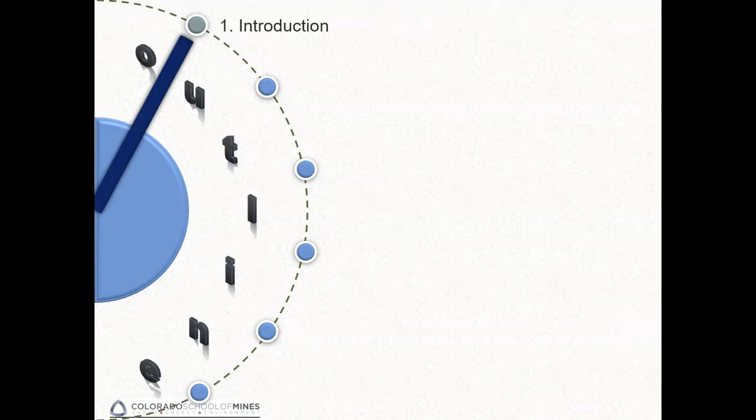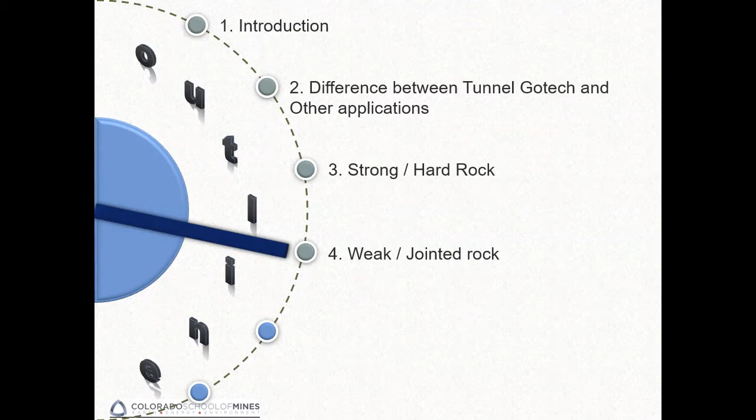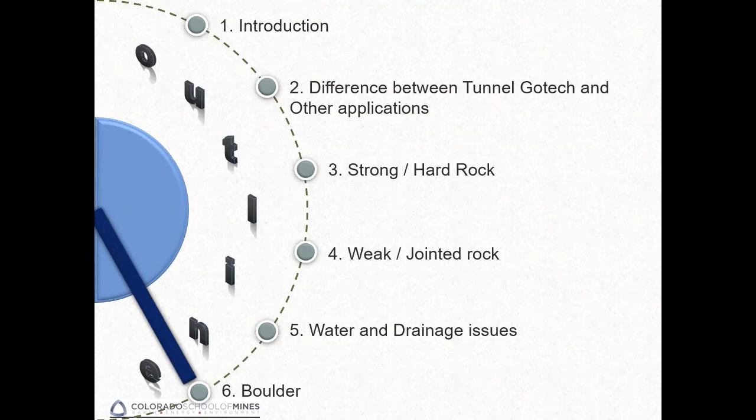The topic that I wanted to talk about is the lessons learned on the claims that have come across in the tunneling world, especially for tunnel boring. So essentially, we'll talk about what makes tunneling very special, and especially the issue of geotech investigation. We'll discuss some of the issues we've encountered relative to hard rock, talk about weak and jointed rock and what the issues are and what the typical claim situations are for jointed rock. Of course, water has been chasing miners and tunnelers from the beginning of time, and it's consistently an issue there. And I'd like to touch upon the issue of boulders. Boulders are made of rock, but they're in the matrix of soil, and they're the worst of things we can encounter in tunneling, especially with TBM.

So diving right in, essentially, why are we talking about this? Why is this issue important? If you look at the world of tunneling and contracts, about 90% of contracts in tunneling end up in claims of some sort, one way or the other. Could be a change order, it could be an actual construction claim relative to differing site conditions. So differing site condition is the term I'm going to use, DSC. So if you hear me saying DSC, that's what it means, differing site condition.

And what it refers to is that the contractor comes in, starts the tunneling, and something happens, and essentially they can go to the contract clause and say the site is different than what I was told. It's different than the geotech investigation reports and geotech baseline report. And that is a basis for claiming and getting compensated, right? So this DSC is a major issue in the world of tunneling.

Why is it happening so frequently? It's because we have a borehole here, a borehole another couple hundred meters away, and so on and so forth, sometimes a couple of kilometers before we have any information. And it's left up to interpretation of what is happening between the two.

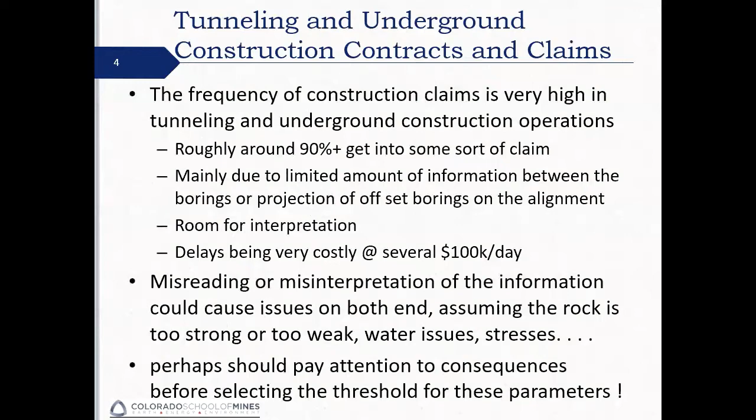Although the industry has tried to address it by advocating geotechnical baseline reports, which essentially look at the information and set up a baseline for all the contractors, there is still some room for interpretation. The key takeaway I will reemphasize is that you have to look at the consequences of each of these situations before you can come up with the right way of addressing it in your geotech investigation.

The first construction claim I got involved with was actually in the early 1990s. I started working at EMI, and there was a project going on in Colorado Springs for a water tunnel, the Twin Peaks tunnel. The TBM was small, and the rock is typically granitic, but it's pegmatite - very coarse-grained Twin Peaks pegmatite.

The claim was on low penetration rate on the machine. We brought some large samples from the site here at EMI, and we tested with a linear cutting test.

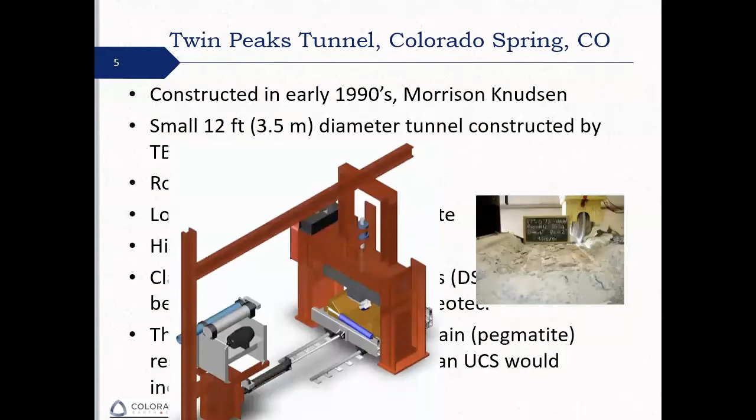We recorded the forces, and what we found out was that the forces on the disc cutters for cutting of the rock of the TBM in pegmatite and coarse grain granites was different than a typical medium grain or fine grain granite. That was not actually reflected in the unconfined compressive strength, which was quite an interesting situation. So higher forces means lower penetration by the TBM. And guess what? That was the differing site condition there.

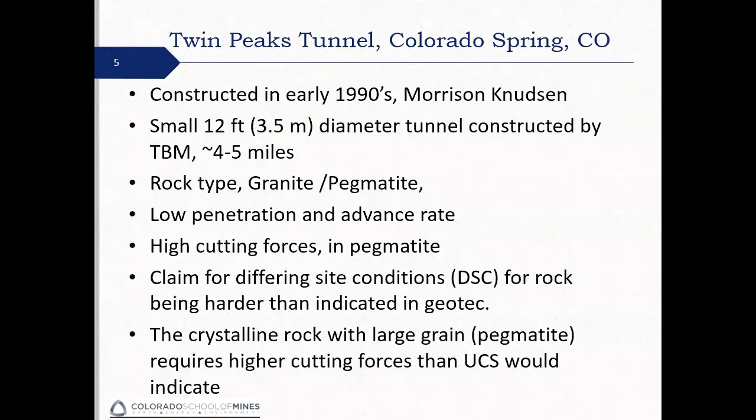These are the pictures and actually drawing of the linear cutting machine and the surface of the rock in our testing at EMI.

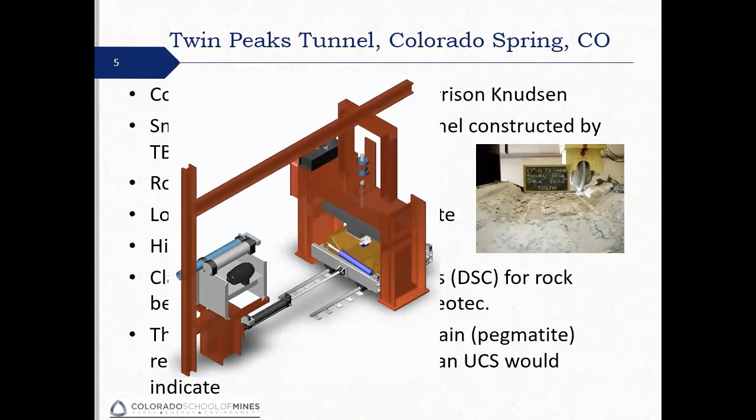A follow-up project was the Boston Outfall project. This is a project where they sink a shaft, go under the ocean at Deer Island, and collect all the sewer from the Boston area and pump it into this outfall, where it gets diffused in the water stream in the ocean. So it's a 10-mile long tunnel, 26-foot diameter, roughly 7 or so meter diameter, built by the Kiewit Atkinson Kenny joint venture. The geology of the area, Boston area, is primarily argillite.

Not much depth though, so the stress situation was not that bad. But a differing site condition was actually claimed because in the geotechnical interpretation or summary report, an expert had put down that estimated penetration rate should be 15 feet an hour.

What the contractor was getting was 9 feet an hour. Imagine you're planning for 15 feet an hour and you get 9 feet an hour - that's about 60% less, or 50-some percent less. That created a delay. The contractor actually claimed about $54 million at the time, if I remember correctly, because they had 54 weeks of delay at $150,000 a day cost of running the site. One week is $1 million loss, and 50-some weeks of delay because of the low penetration equals $54 million.

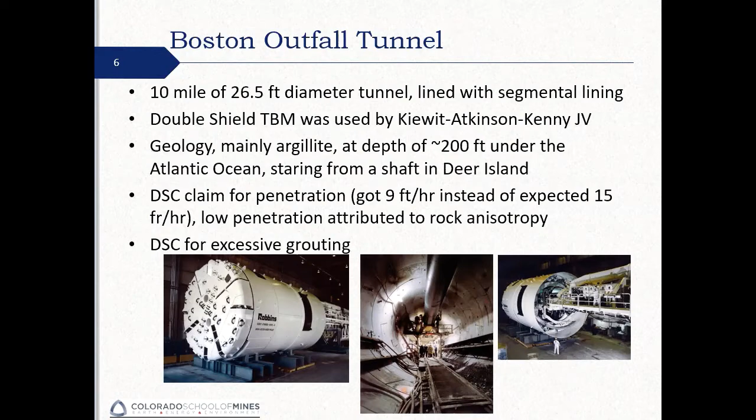In that same project - one of the early projects where they used a double shield machine that you see in the picture here - they had a different site condition claim also for grouting, because remember, this is going under the ocean. Argillite, which is a high-grade siltstone sandstone, is supposed to be a very tight formation, but it was leaking water. You're going under the ocean, you don't want water in your backup. So they had to do a lot of grouting - a $70 million claim for the grouting as well.

That was the situation, and right around the same time, 1995, we got involved with this project in Queens - the Queens Tunnel, a water tunnel in New York City.

The claim there was related to formations in a Manhattan schist known to be in the area. The tunnel we got involved with, the Queens Tunnel, was actually built by Kiewit Shea joint venture, a 23-foot diameter machine, roughly 6.5 to 7 meters in diameter, 700 feet deep, about 210 meters.

Again, a low penetration claim. They were getting 6 feet an hour as opposed to 9 feet an hour that had been anticipated. That's about a 30% slower penetration, which means the project is going to get longer and the cost is going to be higher.

We looked at the rock mass conditions. In this case, the issue was rock mass and the frequency of joints. The claim was actually on both ends. There were areas where the joints were less than anticipated, so the machine was going slower. When you have more joints, you anticipate going faster, but the joints were not there, so it was going slower.

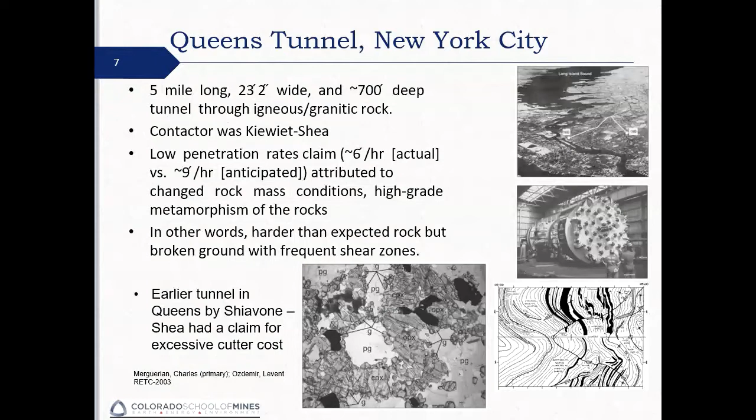You've got to have it somehow fixed and figured out. At the same time, it was funny - at the end of another project, built by Shiavone Shea, another joint venture contractor, a different section of Water Tunnel Number 3 in New York, they didn't have a penetration rate claim, but they had a cutter change claim. The claim revolved around using more cutters than the abrasivity of the rock indicates.

When you have more abrasive rock, the cutters wear faster, so you have to inspect them more and change them more. You have to pay for the cutters and the time of change. It impacts the utilization, meaning your daily advance rate suffers. With daily advance rate being lower, the construction time goes up, hence the claim. So you can see in a simple situation, you can run into a multitude of complexities relative to the machine.

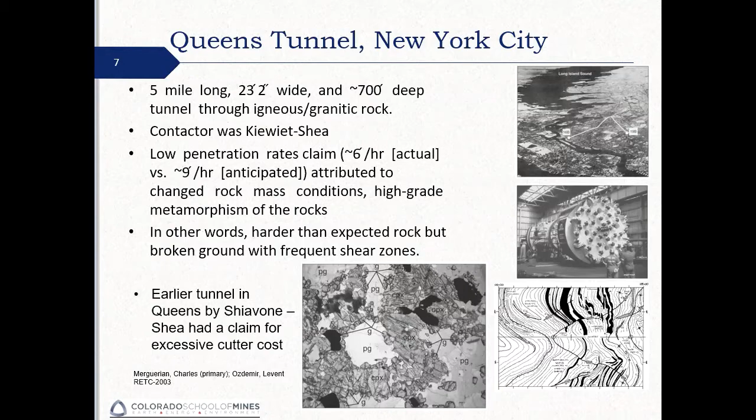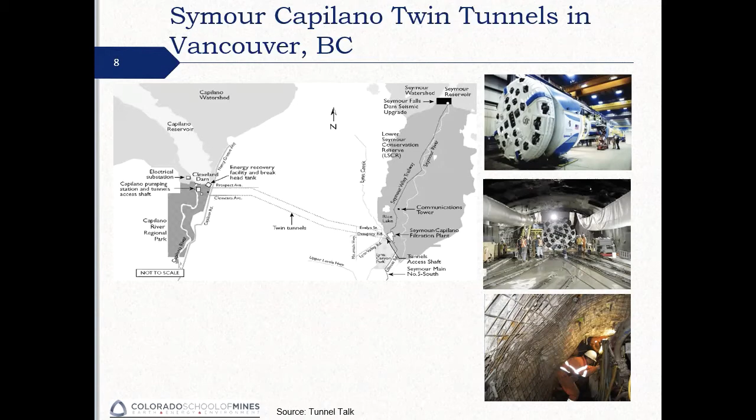The next one, the Seymour Capilano project - I put this one in because it has to do with in-situ stresses. This is the project my tunneling class is very familiar with, because it's their base background project for the semester. This was a twin tunnel going between a dam and a water treatment plant, roughly 7 kilometers, with two tunnels, 3.8 meter diameter. The depth varied between 300 to 600 meters going under the mountain.

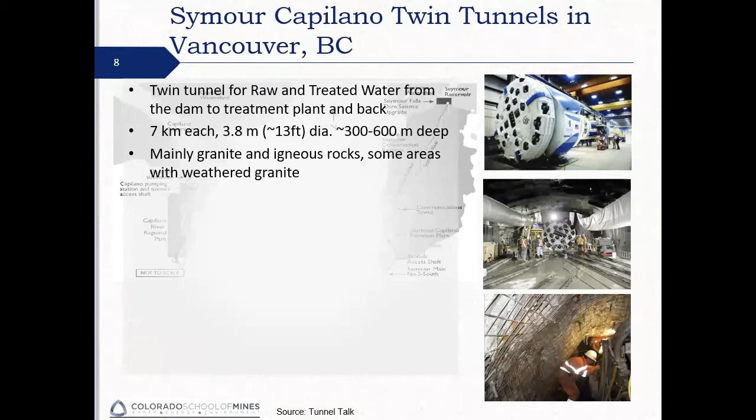The rock was primarily granite, beautiful good granite, but certain sections were actually weathered. However, as they moved in and the depth started picking up, you could see breakage in the formation at the 5 o'clock and 11 o'clock positions, going towards the tunnel. Imagine 12 o'clock is the roof, 6 o'clock is the floor, and the rib lines are at 3 and 9. So 5 and 11, an almost vertical but angled position, was breaking up, and that was because of the in-situ stresses.

After the fact, when we actually measured it, the horizontal stress factor was 2 to 3.5 times the vertical stress. So you're going under 600 meters of overburden with 2 to 3 times higher horizontal stresses - imagine what's going to happen. The 5 and 11 o'clock breakage was because the tunnel was actually being squeezed on the side, so these two points were actively spalling and breaking up. In several visits to the site, we were just sitting or standing on the backup, and you could hear the ground breaking up. It was pretty interesting and scary.

In January 2008, they had a rock burst event. There were 2 machines going simultaneously, one ahead of the other. The machine that was about 100 to 200 meters in front of the other heading had a rock burst where they gently went into weathered ground.

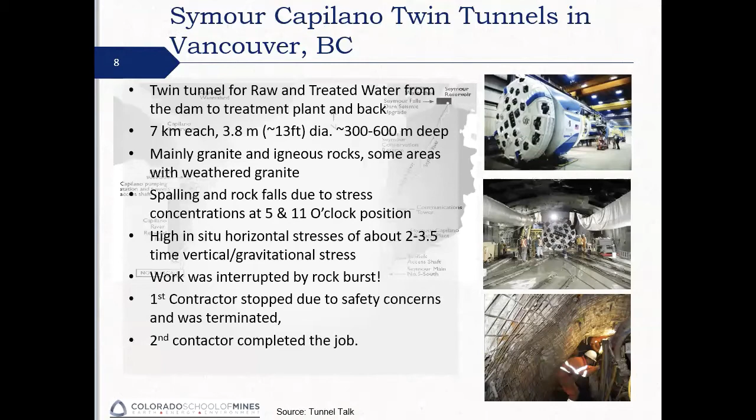So if you're in an area where you anticipate high in situ stresses, you have to take it into account and essentially care for it.

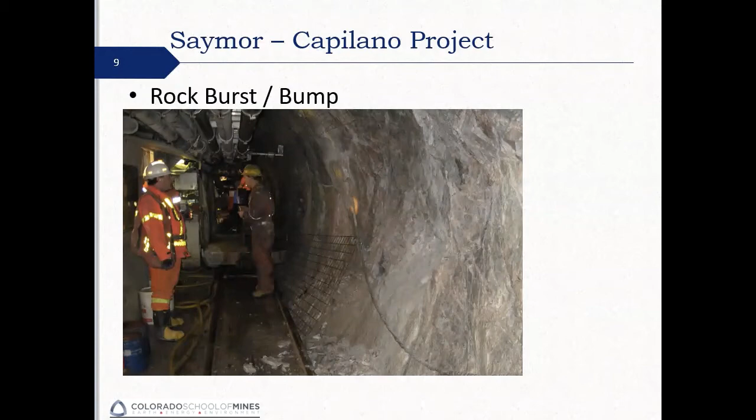Because here's what happens - you can see the profile is supposed to be a circle, right? And the wall up to about a couple meters had already collapsed and come in. This was what the roof would look like - it's bulging, it is actually actively crushing the roof and floor. And in the roof area, it was accumulating on the wire mesh, you could see it.

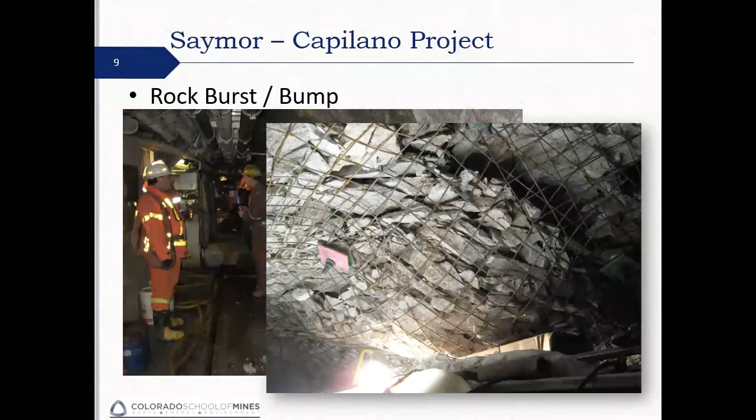When you see something like this, you cannot just walk by and continue tunneling. You have to go cut the wire mesh, clean up that mess, set up another set of wire mesh, and do the bolting again. Imagine that bolt - what is it holding? The anchor is holding onto some part of rock, but the rest of it is literally holding the broken ground. So you have to cut off that bolt and put new bolts on.

Let me show you this quick video. Okay, it doesn't like it. Anyway...

In the video, what you see is the machine actually cutting into the ground, and here is the finger shield behind the head. As the machine is cutting and going in, right behind the cutter, in the finger shield area about 2 meters behind the face, the ground is crumbling and coming down. It's breaking on its own because of the stresses. That is the situation they had to deal with.

Of course, if you go to some of the longer tunneling projects, like the Gotthard Base Tunnel - a 57-kilometer tunnel, 151 kilometers total with the crosscuts and everything, the TBM portion about roughly 100 kilometers - the project went under up to about 2 kilometers worth of overburden.

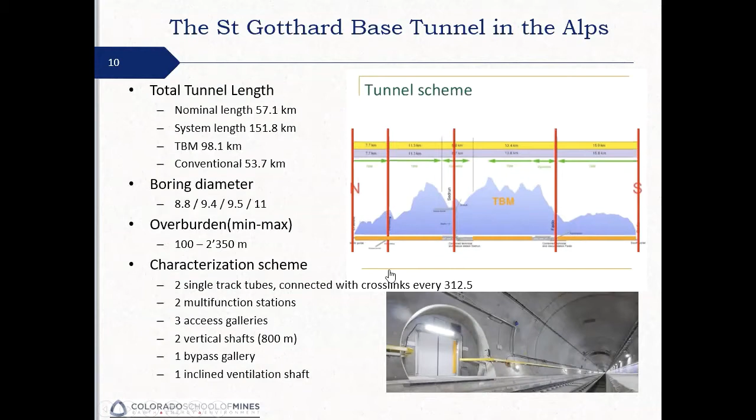No matter what rock type you're going through, when you go to 2 kilometer depth, the in situ stresses are high, and with induced stresses added to it, you have to anticipate either rock burst or ground squeezing in most cases. The ground squeezing was actually an issue here. It forced them to change the construction methods from a shielded tunnel to open tunnels, because by design they allowed for huge deformation in the ground.

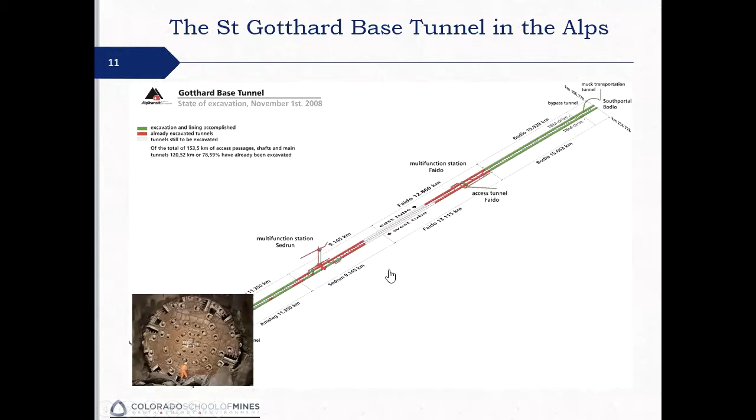So when you have an open TBM, it allows you to excavate, and in the back of the machine you put ground support up. But by design, you're letting the ground converge, and you have to put secondary and tertiary ground support in.

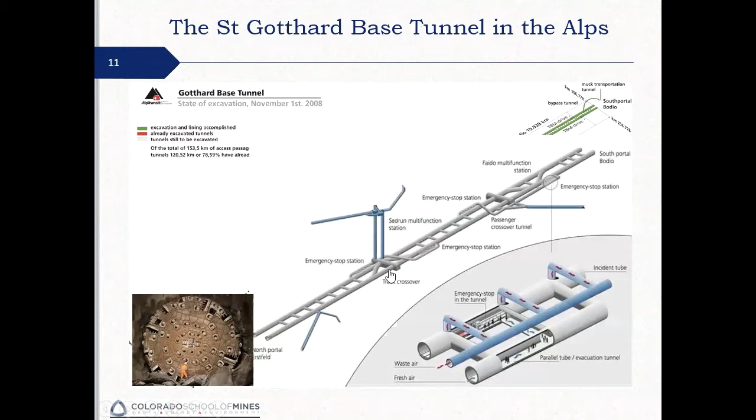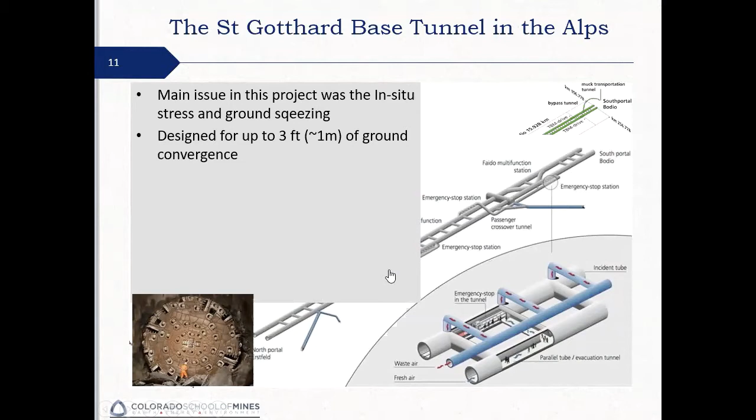In that project, based on what I know, they did a fairly meticulous risk assessment and were pretty much ready for a lot of this. By risk sharing, the owner was willing to pay for it instead of going directly to a claim. I don't know the details of the claim situation, but by design they had to deal with ground squeezing, and selection of the machine and construction method per section reflected that knowledge. They used an open TBM by design and allowed for a lot of changes.

The next project I want to talk about also has issues with ground squeezing. This was in Iran, the Ghomrud project. It was a total 50-kilometer tunnel in 5 packages. Package 3 and 4 were excavated by the double shield machine you see here. The general depth was not all that much, 200 to 400 meters, but the rock was weak, a schistose rock and fairly weak.

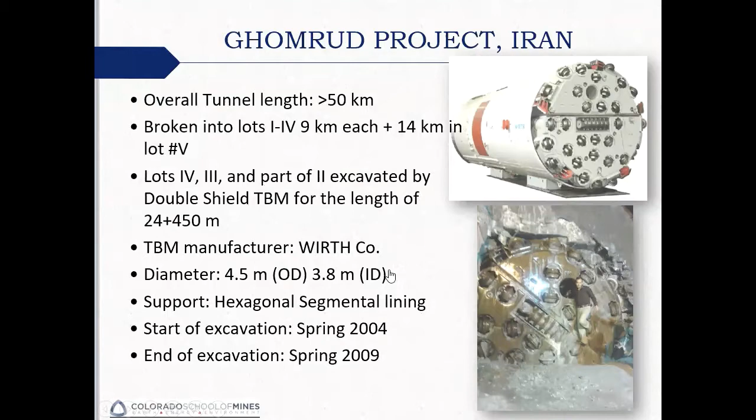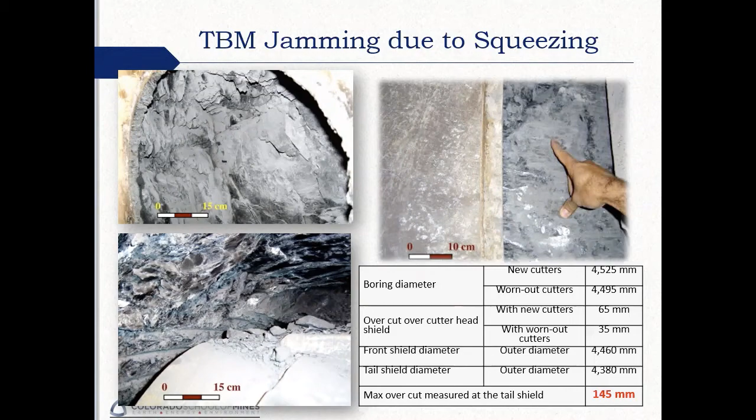It took them, the first time they got stuck, 4 to 5 months to release the machine. Releasing the machine is like this: you go out of the shield, manually break the rock and put posts, hoping that the ground would hold up, and when you release the machine you push against the segment to go forward. Very dangerous, very risky job and time consuming. 5 months, you can imagine the cost of that.

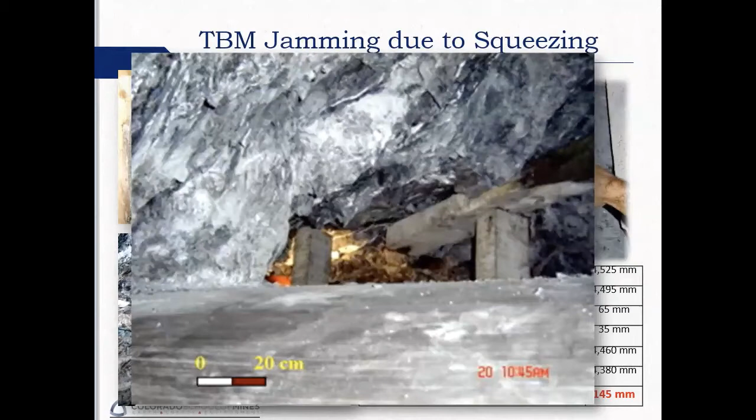So in ground squeezing, this is the situation, you have to anticipate it. If that is the case, essentially be prepared to go with an open machine, as was the case in Lötschberg. Double shield is a curse there because it gets stuck. They actually released the machine again a few months later and a couple of kilometers away. As you remember from the geotech investigation, there were several sections with squeezing, and they got stuck again. How much could they do to prevent it? If they could maintain the machine advance at a very fast pace, they could pass through the ground squeezing, because squeezing is a time-related behavior. If you go through it fast, you might get away with it. If you have delays, then the ground comes at you, and when you get stuck, you get stuck.

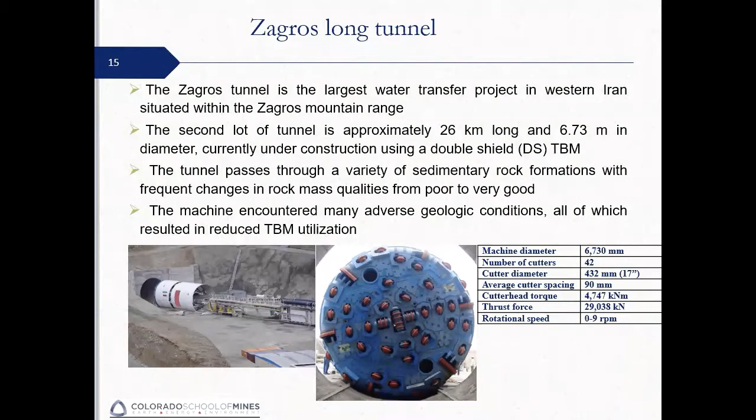The next project is Zagros Mountain tunnels. It's a combination of several projects, but this particular lot was a 26-kilometer, 6.7-meter diameter double shield machine again. But this double shield machine, remember, is not a pressurized face, so the water comes in as you go through the formations. The problem was running into gas.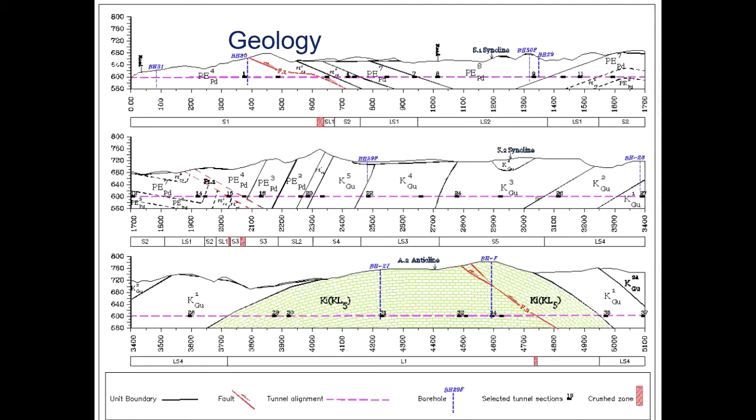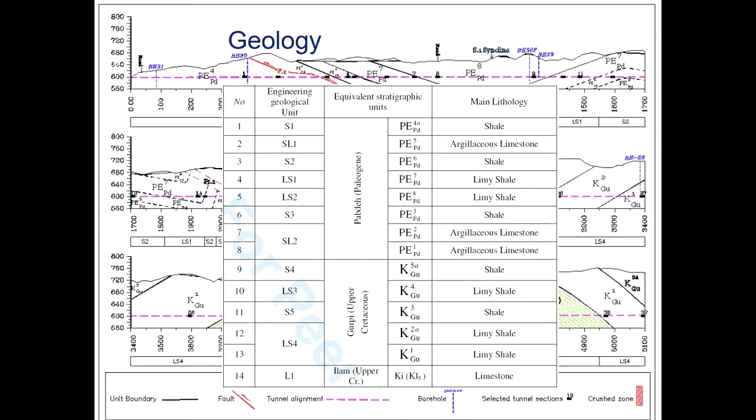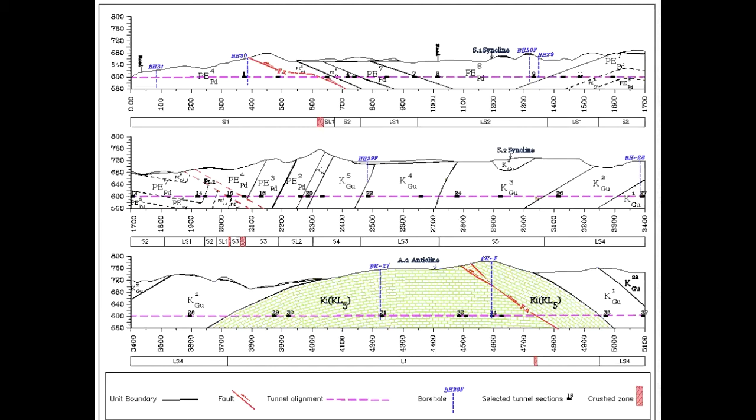So this is the geotechnical profile. The formations here are known, this is in Western Iran, and the formations were known to be the same general formation where they were producing oil and gas. And guess what, right? They ignored that fact and ran into it. You can see these Gurpi and Ilam formations are known to be producing oil and gas. They were expecting that the limestone in the center had already evaporated and gone, and they didn't really pay attention to going to depth and sampling.

So what happened was they actually had H2S, which is hydrogen sulfide, and CH4, methane, coming in.

Bad news, really bad news. What happened was that they literally had to go and redo the whole damn machine, because the machine was not explosion proof and definitely was not set up to deal with the acidic conditions of the H2S, meaning that a lot of components of the machine had to be hauled out, redone and put back. Some of them had to be repaired in place, and with the H2S and methane presence.

As I will show you, when they encountered the gas first, it was where there was a huge inrush of water coming in. On the right-hand side, you can see the guy is trying to get out of the train, and the water is up to their almost waist in the train. So the amount of water coming in was very high.

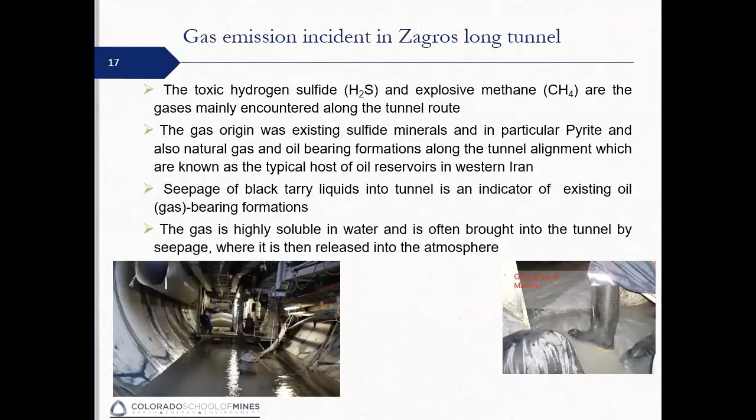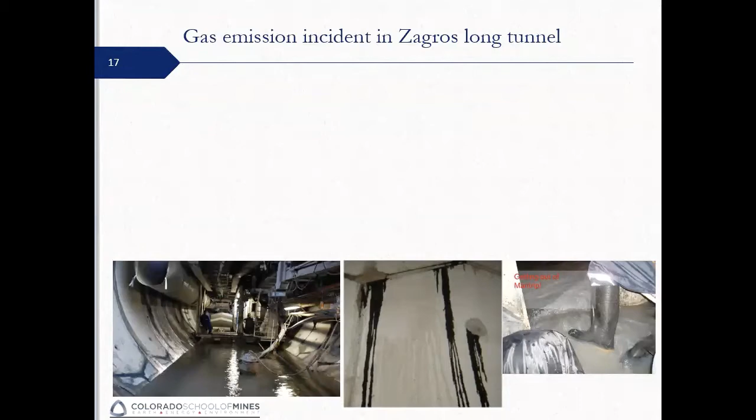As the water came in, you could see gas is going up. This picture shows the tar that is coming through the joints of the segments. Tar is a hydrocarbon product coming in. So with tar, you can anticipate gas and other stuff.

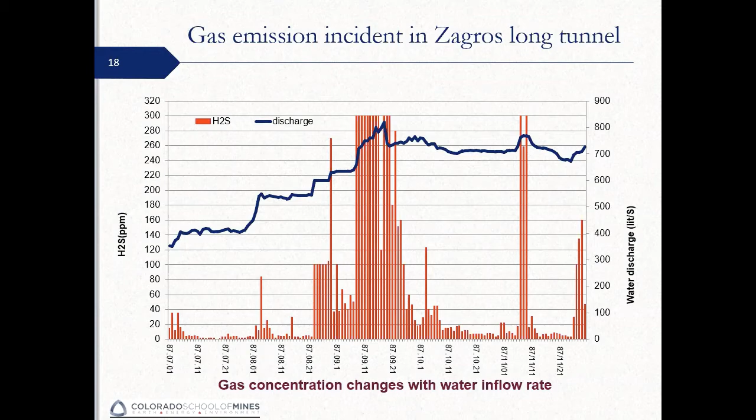Let it drain, then go back with a mask, and I'll show you the picture, and essentially with the oxygen mask and PPE level C or D, start dealing with this situation. And ultimately they had to try to capture all of that water as soon as possible, pump it into a pipe, and release it outside so that the gas is not released inside the tunnel.

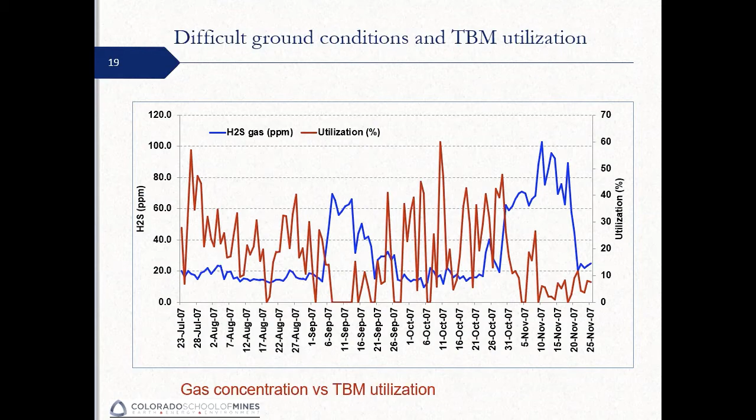You can see the utilization versus the gas release. When the gas release was high, everybody had to walk out. So you see the people going in with the PPE level C or D with oxygen tanks on their back, trying to maintain the machine and run the operation. Very difficult, very slow. Unfortunately, in a situation where a couple of the workers ignored the fact that they needed to go in with the PPE, we had two fatalities in that project. So gas is bad news.

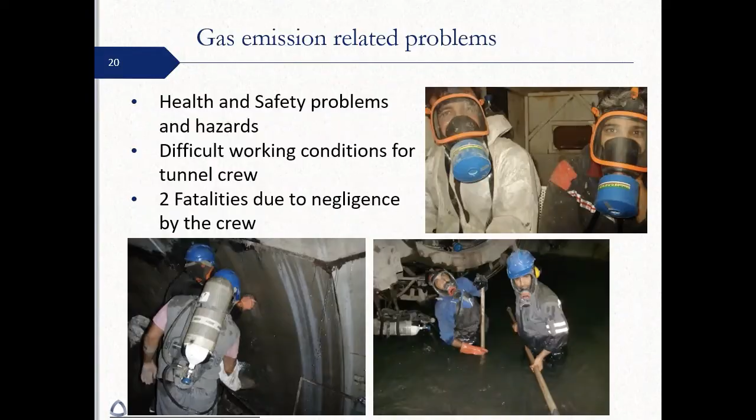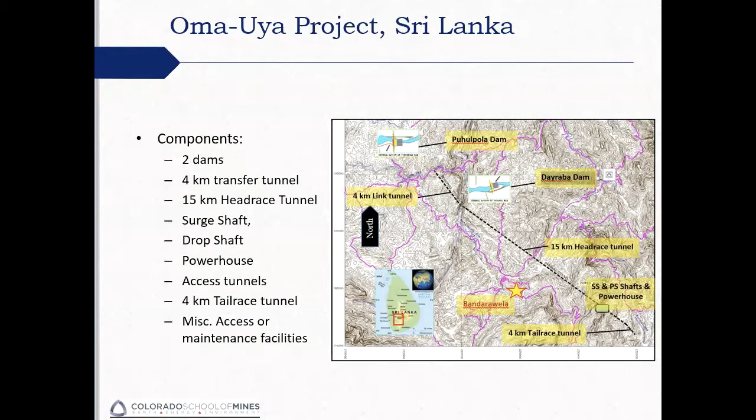One of the recent projects was this Uma Oya, which is actually a complex of two dams, an interlinking tunnel, a head race to a drop shaft, and the power station and tail race. It's a pretty big project, 1.2 billion, in the highlands of Sri Lanka. The head race and tail race was actually mined by TBM, by double shield. These are the pictures of the site, fairly rugged mountainside. You can see the job site with the segments.

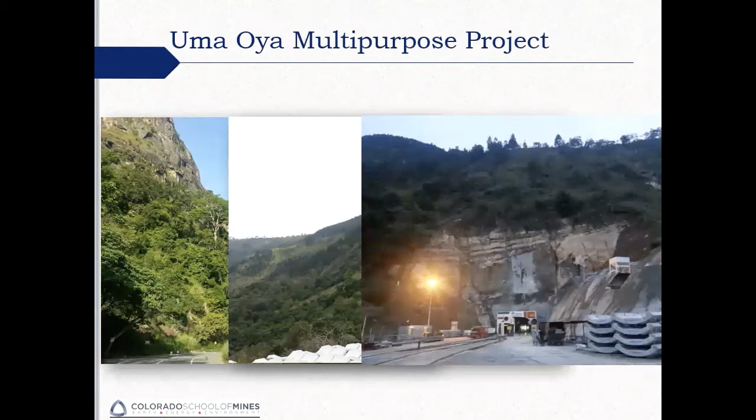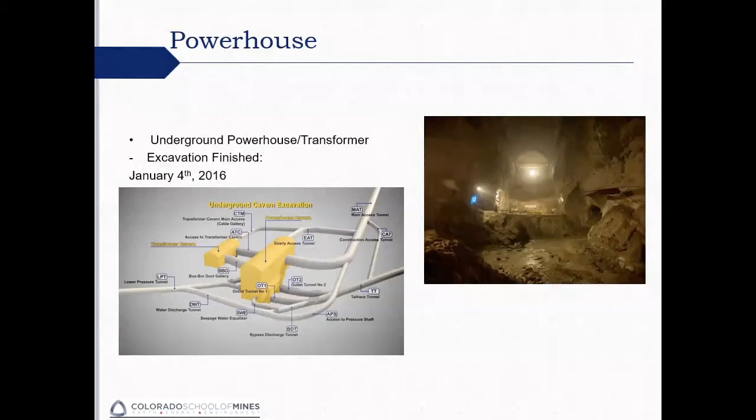This is the portal of the head race TBM. This is a general picture of the whole complex and the caverns. What you see here are not swords, these are the pieces of rock coming out of the face. It was so hard at the section that the disc could not cut it, and the cut would not go through between the discs. So it's a fairly messy project in that sense.

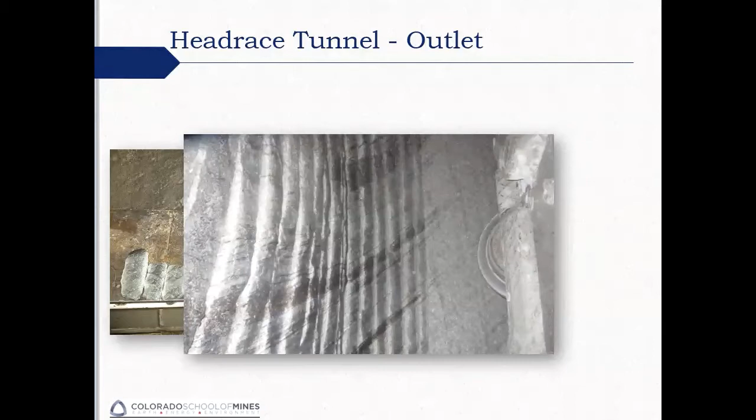At the beginning, you see these ridges between the cuts at the face, and they were building up to about probably 3.5 inches, and it wasn't clearing out. The result was that the discs were wearing at such a rate that was unbelievable, and they were not making progress, 1 or 2 millimeters per revolution, which is actually a big damning situation.

This is a picture of the face. This is what was happening to the discs. Rock, when it is abrasive, it is not forgiving. It messes up everything. Look at the center cutter being really worn out. And you have to go in not only to change the cutters, with this type of damage you have to change the housing. So there is a lot of welding, cutting involved in that. It is very time consuming.

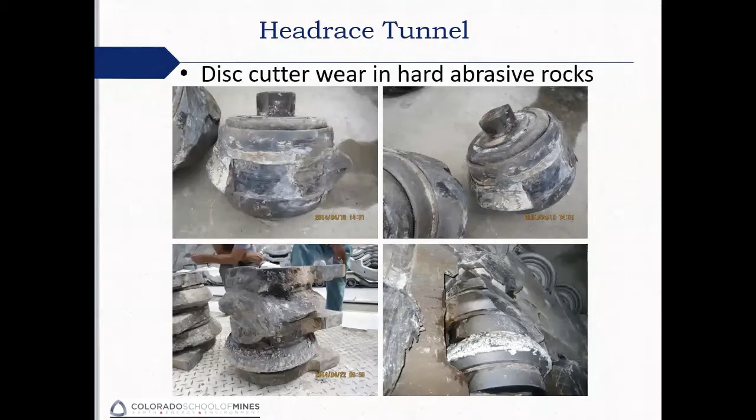They passed through this section anyway. However, they ran into water, a lot of water. In 2014, they hit a water yielding formation at 1 cubic meter per second, and that is going to mess you up, right? So they had to stop and actually grout the place and then continue.

And in the next zone, they hit another 2 cubic meters per second. By 2015, they hit 4 cubic meters per second of water gushing in.

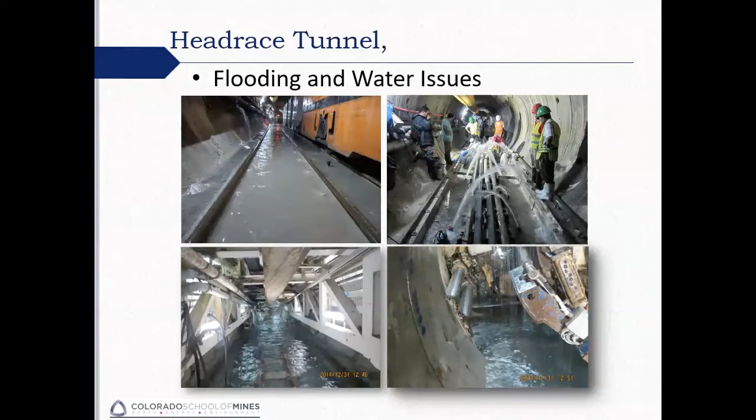You know what that looks like? Let me show you. This is what's supposed to be the tunnel with a double track. This is the tunnel with 4 cubic meters of water pouring through. If the videos aren't coming up, let me check.

And let me see. This was the train ride going up. Not a pleasant water ride in a tunnel.

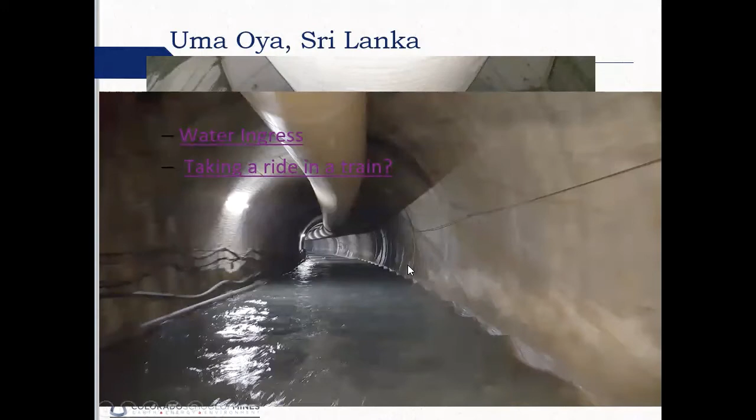It caused a lot of social issues as well, because it was literally draining the surface water of the creeks, all the wells for farming communities - a death sentence. A lot of issues there.

Next project is actually under construction now. I don't know whether there is a claim - if I knew, I wouldn't tell you. This is the South Hartford CSO project.

You can see the formations and the tunnel alignment going through Hartford Formation, a beautiful, nice limestone going through a fault zone where it runs into multiple layers of basalt, and a different limestone, Berlin or something formation. But look at the profile here.

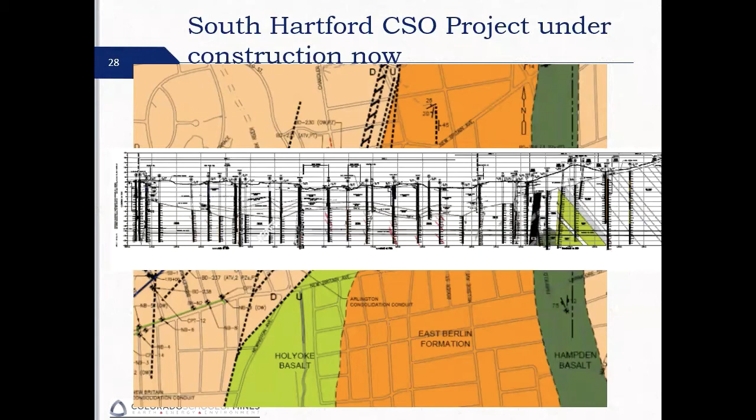A lot of holes, and it shows this particular zone. Again, on both sides it is fine - good limestone - but in the middle there it is running into these fault zones. So let me blow up the middle section. See over here, there are all types of faults going through.

What scared everybody was that in one of these borings, they measured water pressure. Essentially, as they started boring, water started gushing out. So it was artesian pressure, higher pressure, probably being fed from the upper level formations through special channels.

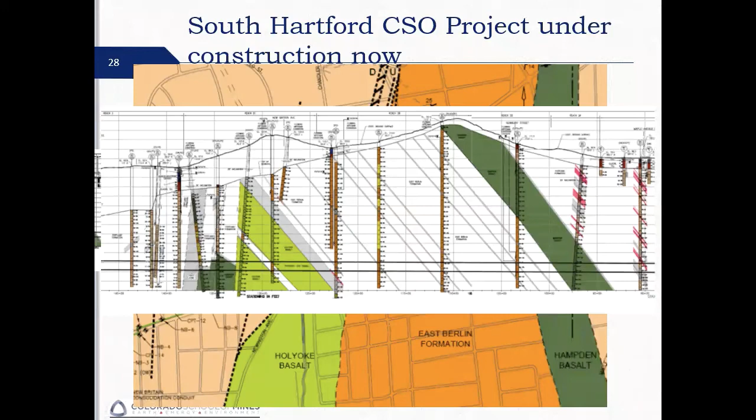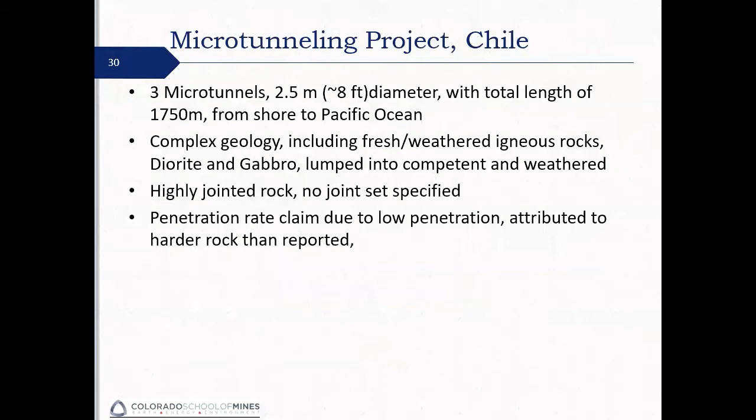A project in Chile for El Teniente was fairly interesting. It's supposed to essentially suck water in from the ocean for water treatment and desalination, then send the desalinated water or wastewater back into the ocean.

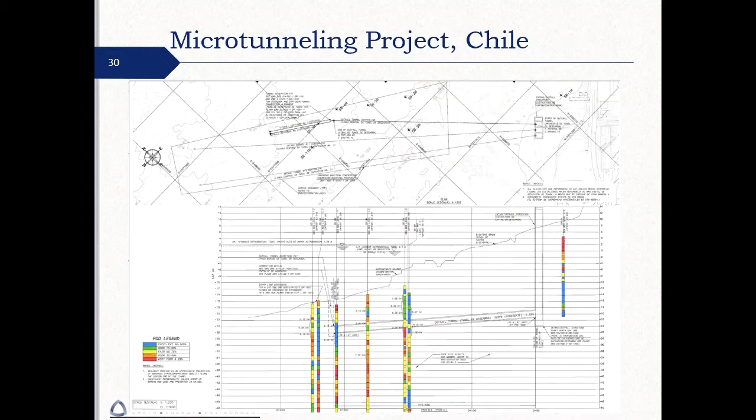And this was the profile. It was so messed up that they chose not to even call it any particular formation - they called it unclassified rock. Well, that's a risk mitigation system, however the contractor had to deal with it.

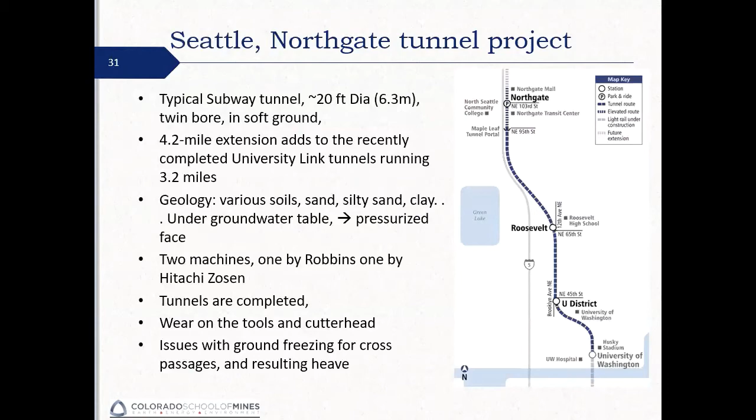So these are the situations that could happen. Seattle, one of the University Link metro lines - what I'm going to show you here is soft ground, so it has nothing to do with rock, except it ran into a boulder.

And look at this - this is the job site, this is the tunnel and so on, this is the machine pulled out, and this is what the machine would look like. If you pay close attention around the head, there's a section that's been messed up like here. One or two boulders can do this much damage to a 6.3 meter diameter machine.

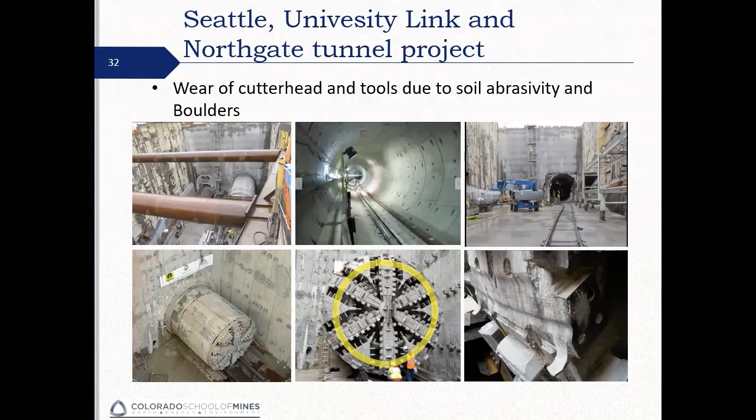So what is a boulder? It's a rock, we have to deal with it. But it's in a matrix of soil and it can cause issues.

A recent project, 7.6 kilometers built by 2 TBMs by pipe jacking, 2.7 to 3.1 meter diameter, 19 pushes, 19 sections. And what they had to deal with was a lot of boulders.

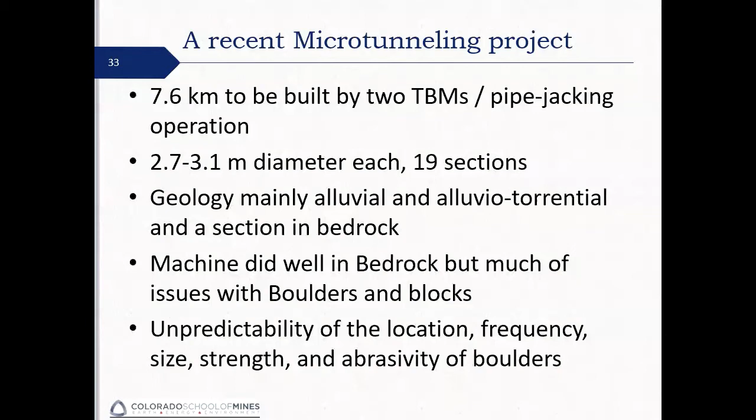It's funny, if you look at the profile, as I'll show you, there is a section that goes through bedrock - machines just nailed it, zipped through. But in the section that had alluvial with boulders, it was problem after problem. So the project went from 880 days anticipated to about double that, roughly 1,600 days, and a huge claim.

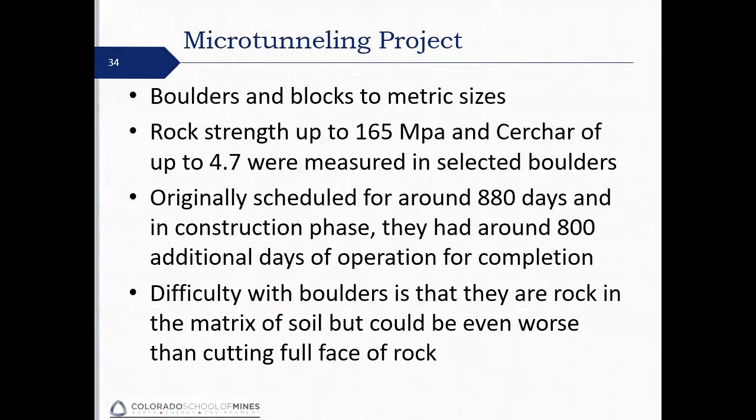The boulder strength measured up to 165 MPa, with a Cerchar of 4.7. That is scary, guys - 165 MPa boulders, 4.7 Cerchar - that's major stuff. It hits the face, it could really mess it up.

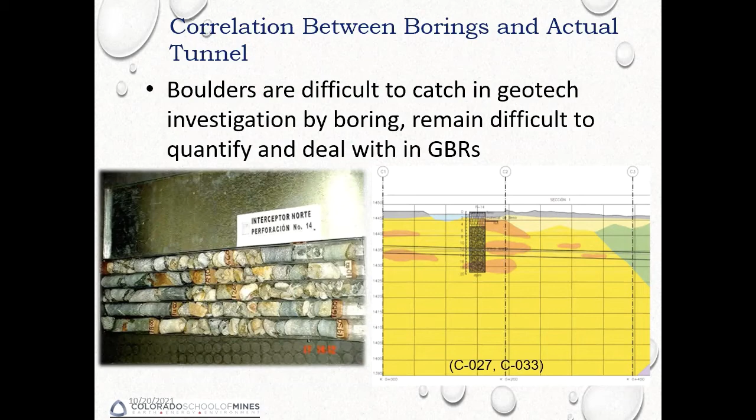So you'd essentially see here are the borings, showing some rock fragments and boulders. And if you look at the shaft sites, these are the shafts, going section by section. Some sections indicated a lot of boulders but nothing happened. There are sections that had no boulders, then the machine had to go through a mess.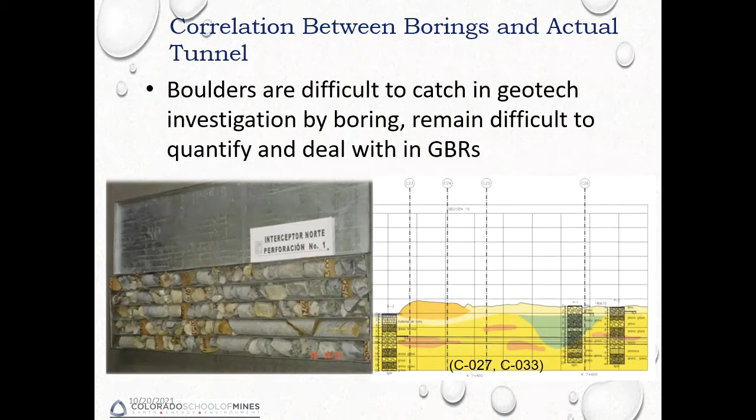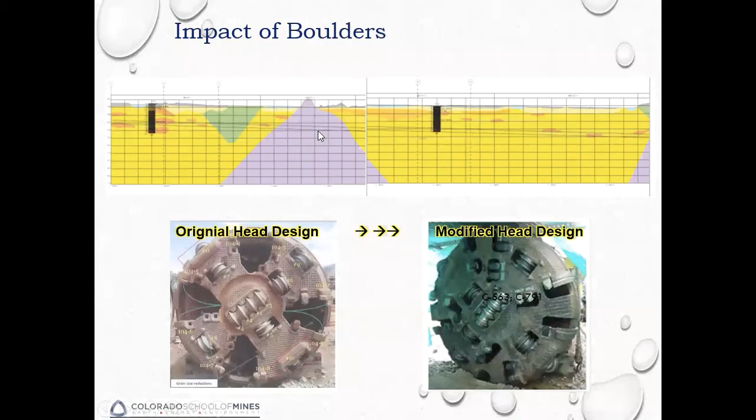This is the end of the project at shaft 26. Again, a couple of boulders were anticipated, or a few per se, based on the borings, but in reality the machine zipped through it. So this is the picture of the machine and the formation - what you see here going from one shaft to the other, it went through actual bedrock and did fine.

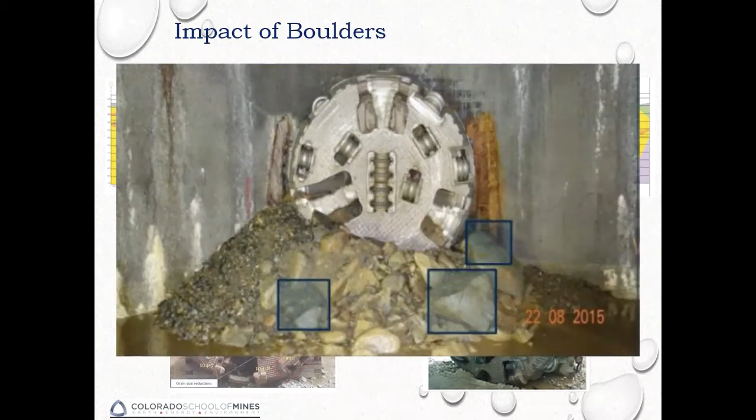So this was a very brief overview of the type of issues we may run into. Rock strength in the geotechnical baseline report should be realistic and reflect what we should anticipate. Abrasivity could really mess up the operation, you have to pay attention to it. Joints and rock mass - if you overestimate or underestimate, it's going to come back and haunt you. It has to be, to the extent possible, realistic, but you have limited means because you're going through the borings.

Groundwater is probably our worst enemy. I've seen, especially in the past 10 years, some projects go in a totally different direction just because of groundwater issues, because they don't want to deal with it as a risk, especially in urban areas. The rock face is stable, the wall is stable, but the water coming through will actually lower the groundwater table, and that would create subsidence at the surface. And that's something a lot of owners and contractors don't want to deal with.

Gases, bad news. So in a lot of geotech investigations, you have to pay special attention to total hydrocarbon measure, TPH. And if there is a possibility of gassy ground, you have to be very clear. I mean, all the contracts in LA now, the ground is declared gassy. Why? Because the gas comes in, everything else shuts down.

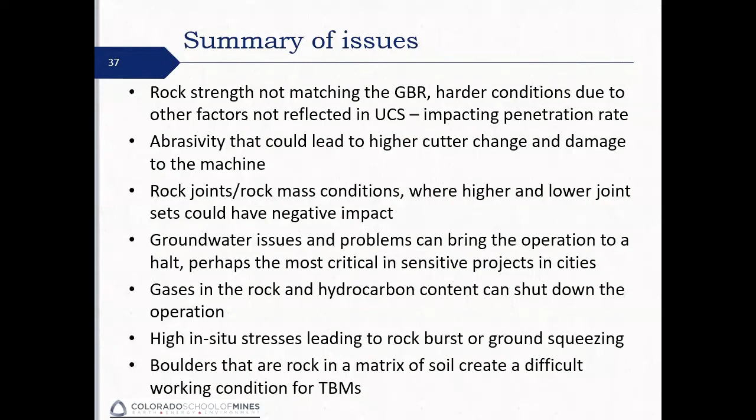So selection is very difficult. And in many projects, getting longer and at higher depth means you have both situations, the squeezing and rock burst. So you have to do risk mitigation and matrix to see which one is worse, so be prepared for it. And of course, boulders, which is really going to mess up everybody.

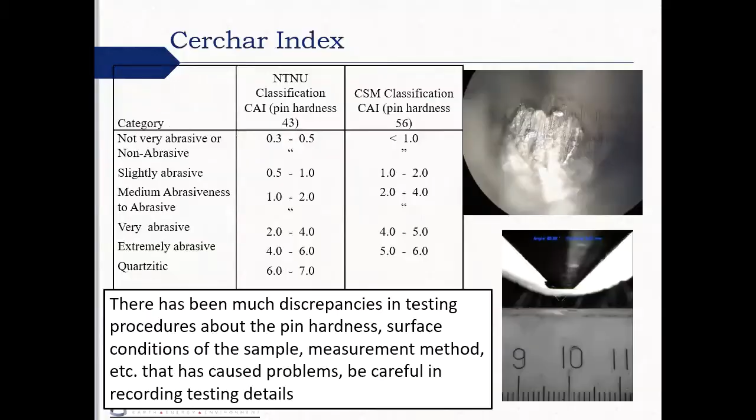So I'm going to just jump through some slides. I wanted to discuss what the geotech mitigation systems are, but I'm going to go right to the concluding remarks here. What you see in these slides are primarily different geotech measurements that you can actually do to try to mitigate some of these risks.

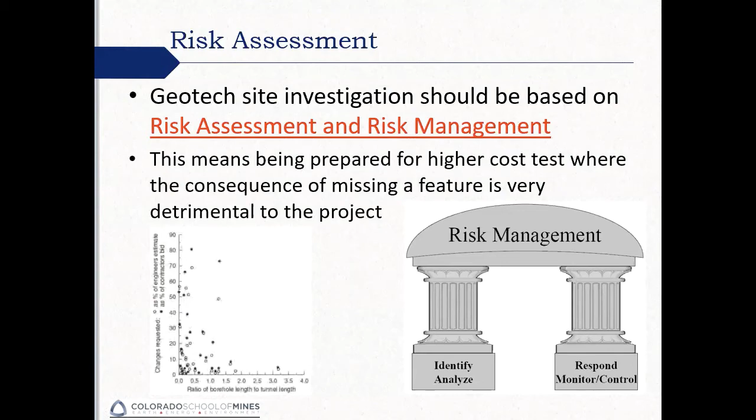So the higher number here means bad news - means there's a construction claim coming in relative to, or as a percentage of, the bid cost. So let's say for every dollar on the bid, you could face a 60, 70% higher number in the actual construction because of the claim. So you've got to be careful there and don't shortchange the geotech investigation.

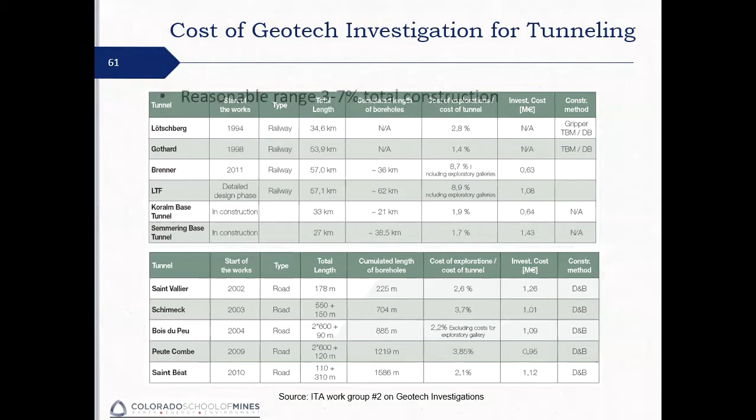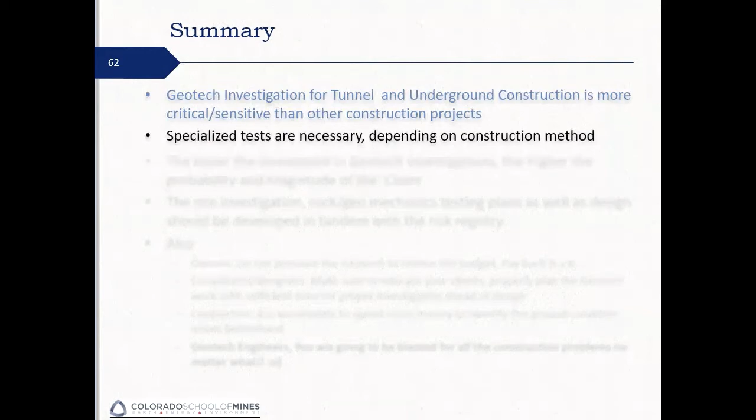Do a good job of risk profiling and risk registry. These are some essentially costs of geotech investigation relative to the cost of bid for recent projects. And the higher geotech investigation gives you a better chance. Ultimately, geotech investigation for tunnels is really critical, different than other construction. It requires specialized testing depending on the construction method. If you shortchange the investigation, it's going to come back at you as a claim.

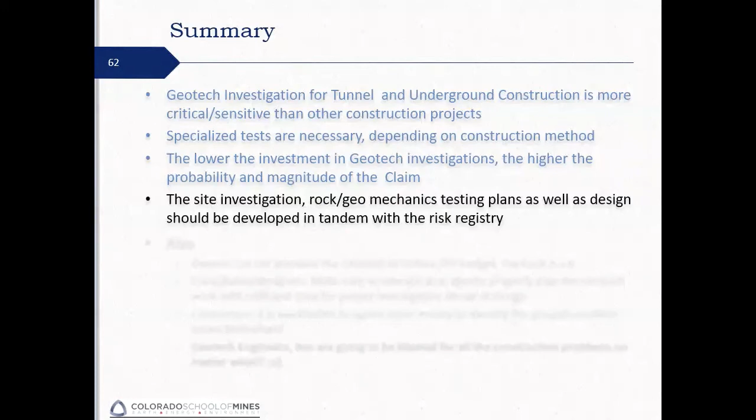Site investigation in rock, or geomechanic testing plans, has to be dovetailed into the risk registry. Don't separate them, it has to be combined. You have to know what the risks are so that you can do the proper investigation. And a word of advice for owners: don't shortchange geotech, because the comeback is a bitch. It's going to come back and haunt you. Do it right the first time.

Don't shortchange the geotech. Geotech consultants and designers, make sure you educate your client and properly design your geotech plans relative to the risks. Contractors have to actually spend some money to identify the risk ahead of time to avoid claims and bad ground conditions. And for general geotech engineers, be ready - you're going to be blamed one way or the other. At the end of the day, geotech engineers get the short end of it.